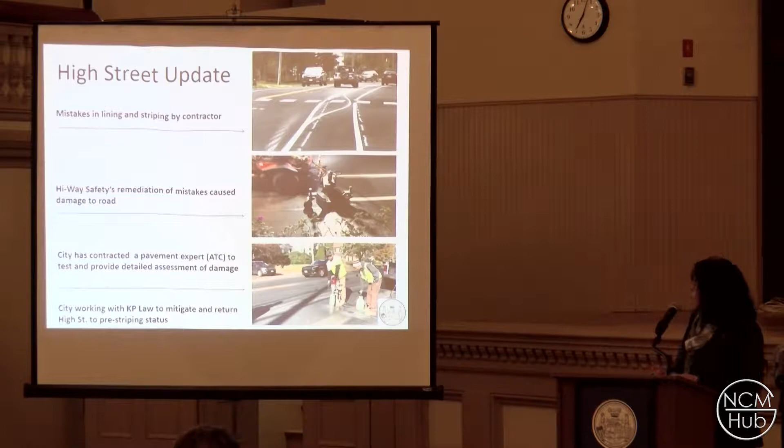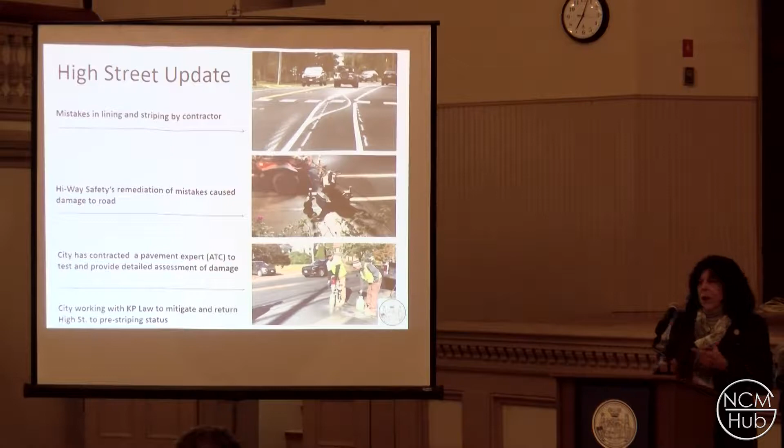So we brought in a contracting pavement expert, ATC, who came in last week and collected about a dozen borings, cores of the road that are now out being tested, which will give us really solid information to stand on as we move forward and work to challenge Hi-Way Safety in terms of the work that they've done. We've pulled in our city solicitor, KP Law, who is working with us, and our goal is to return High Street to the pre-striping condition it was in after Allied did the paving that was there. So we will continue to aggressively work on this, and there'll be more information on it.

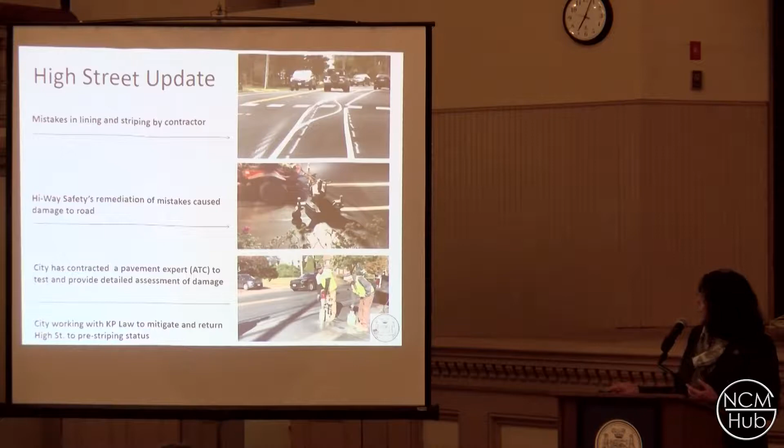So what are some of the challenges we're faced with when it comes to paving our roads? First of all, we've had decades of deferred maintenance all across the city and declining infrastructure. And when you look at paving a road, you also have to look at what is under the ground. We have not only problems with our roads and sidewalks, but also infrastructure issues across the city in terms of what's under the roads: water lines, sewer lines, and gas lines.

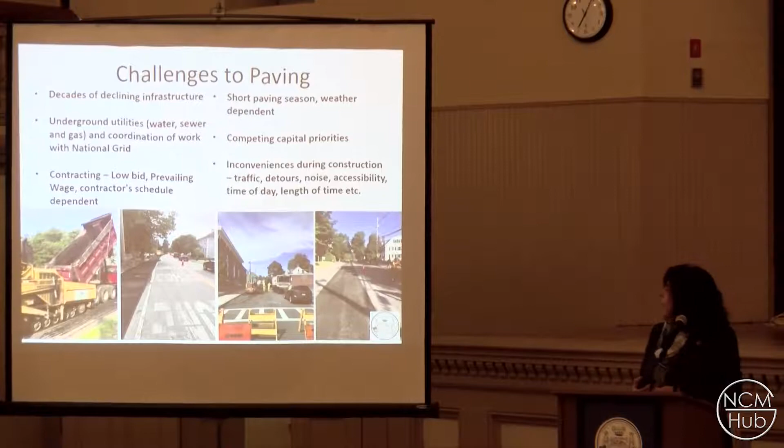When we look at contracting, we are in a climate where we have to accept a low bid, and I'm going to just say it—that's why we wound up with Hi-Way Safety. They were the low bid.

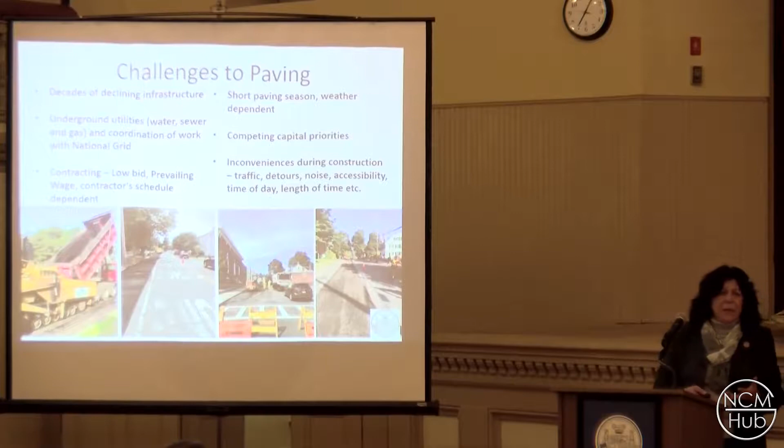They weren't the striping contractor that we've used before. We also must follow prevailing wage, and we're also really dependent on contractor schedules. We have a short paving season, and certainly it really depends on winter weather conditions.

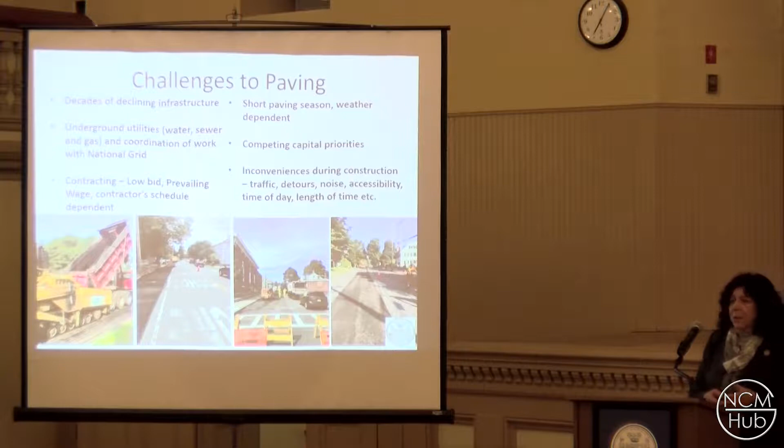For example, if you all recall that wonderful winter of 2015, where we hit 10 feet of snow in 6 weeks, we still had mountains of snow in May. So we really lost many months of being able to do work on our streets. That doesn't always happen, thank goodness, but it's certainly a factor in terms of how much work we can do.

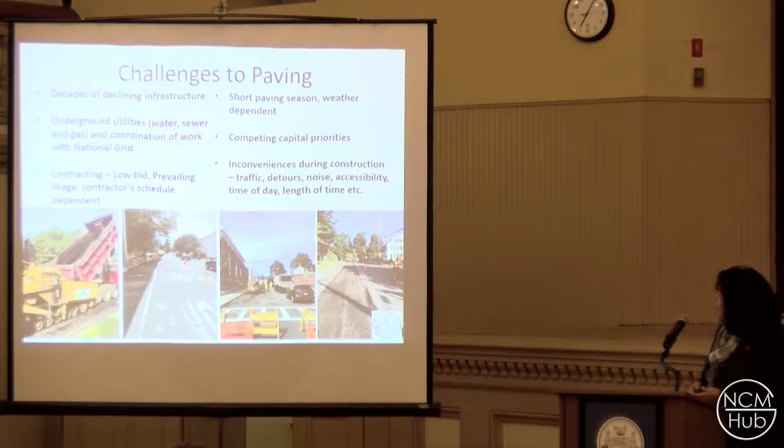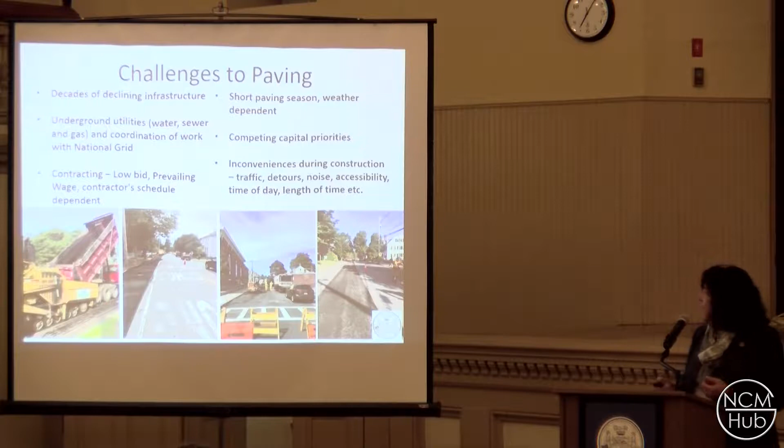We also have competing capital priorities. And once we start paving, we also end up with people complaining about noise, construction, traffic, detours, accessibility, why are you doing it now, time of day, all of those kinds of issues. And we work really hard to communicate with neighborhoods regarding paving.

So how are our roads and sidewalks funded today? We receive state Chapter 90 funding, and we have been advocating - many of you know that I sit on the executive board of the Mass Municipal Association, which represents all municipalities across the state of Massachusetts. And we have been advocating for many, many years for an increase in Chapter 90 funds.

This is the money the state gives to each community based on a formula on how many roads the city owns, in terms of how much money they will give you in order to work on your roads and sidewalks. That formula has not been upgraded in decades, and we've really been advocating with the legislature to increase that. They put out a $200 million bond and then divide that up amongst all the communities for Chapter 90 funds. We get approximately $517,000 a year in terms of Chapter 90 funds.

We have passed an ordinance in the city where 50% of our meals tax, which happened in 2010, is allocated towards sidewalks, and that's approximately $300,000 a year. And then we also, depending on how the budget is going in any given fiscal year - Ethan will go over some of the numbers over the last several years - we've been able to allocate additional money from our city budget for roads and sidewalks.

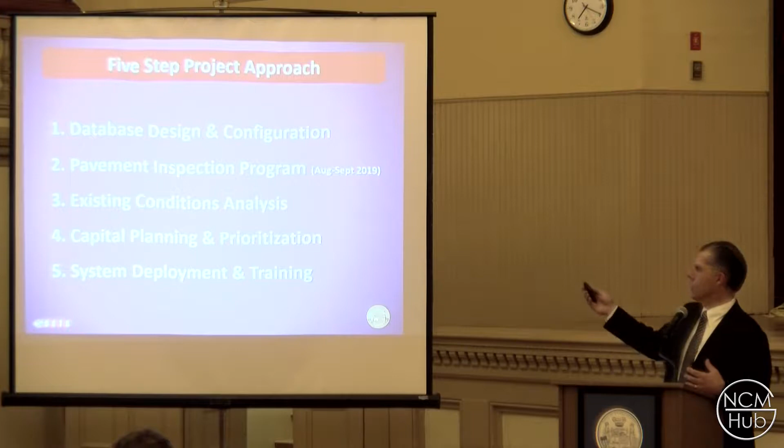The pavement inspection program was completed in August and September. You may have seen a vehicle driving around the city collecting information over about a period of a week. Then from there, once that information is collected and compiled within the database, that gives us now the ability to do an analysis of the information.

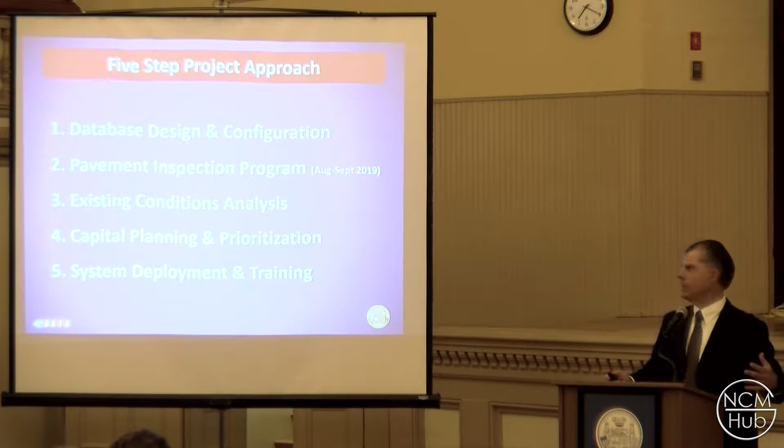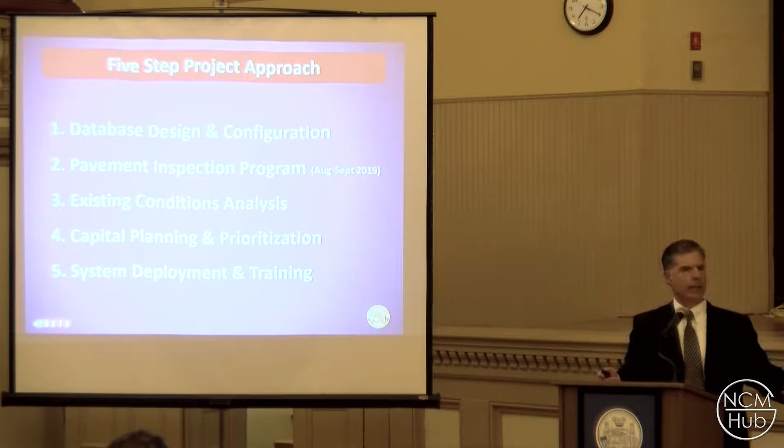There's a great deal of information now that the city has at its fingertips to utilize in the planning process. Step 4 is next steps — we're not there yet, we're still in the data analysis phase. Now we're going to move ahead and develop a prioritized plan. The last step in the process is system deployment and training, where we'll come in and install the program and provide training right at the DPS office.

The data collection program focused on the city's accepted roadways, approximately 72.64 miles of accepted roadways. There's a total of a little over 86 miles of roadways that make up the entire city, but the inspection program focused on the 72.64 miles.

Other aspects of the data are important too, like the mayor mentioned, underground utilities — that's something that needs to be considered. So you have the condition of the pavement, but you also have the underground infrastructure, which is just as important in terms of developing your decisions on your paving program.

Here's some sample roadways. The way the system works is there's actually video collected along all the city road miles, and a photo is created every 10 feet. So when we install the system for Tony and Jamie to utilize, they're actually going to have a photo every 10 feet. They can click and see a photo. These are some examples of the photos that'll be available to them.

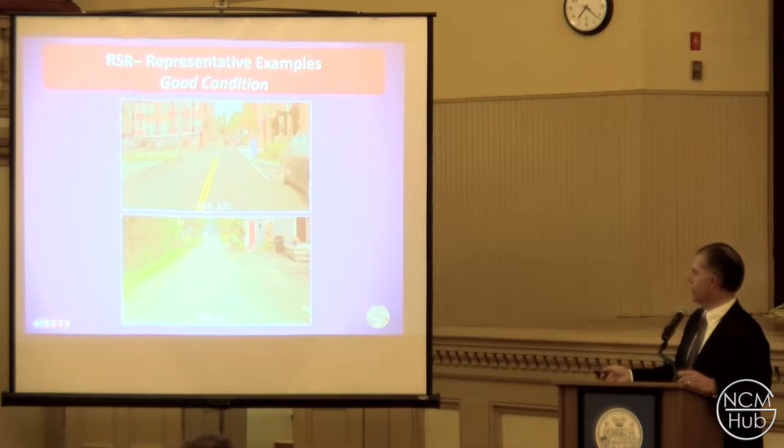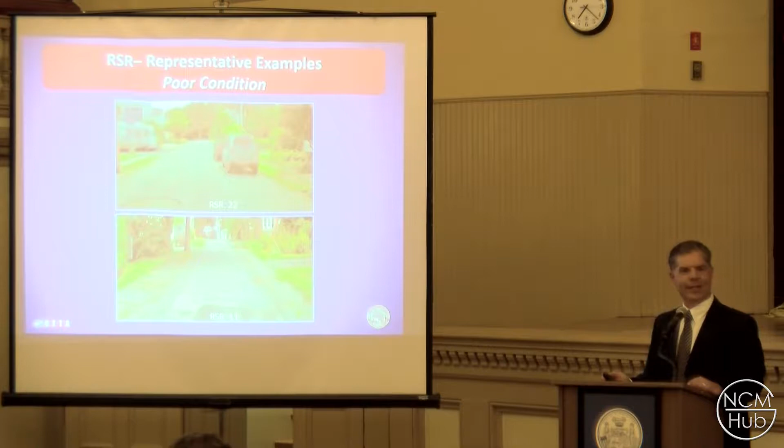Example of a road that's a 100, so that's obviously a road in very good condition. Roadway that's an 85. Then we get into the fair condition category, and you can see how the roadways are starting to show more deterioration, more defects. Here's a roadway that's a 74, a 56, and then we get into roadways that are in poor condition, scores of 22, and the last one shown as an 11. So you can see how the photos range in degree of distresses that exist on the roadways.

So there's a lot of photographs that are available now, so you need a lot of storage.

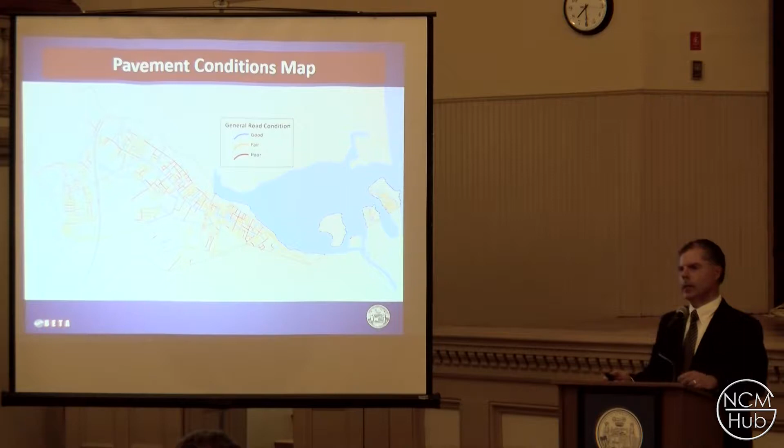This is a map depicting the general condition of the pavement that I've been talking about. You have your good in blue, fair in yellow, and poor in red.

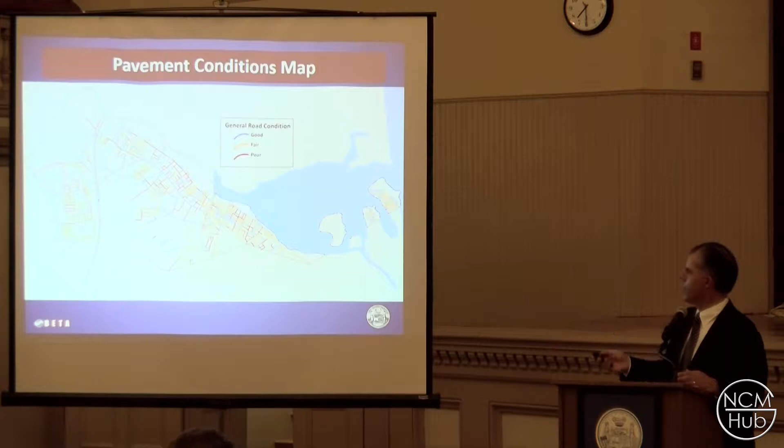We've also got the gas network available to us, so now we know material information about gas and how that comes into play in terms of planning.

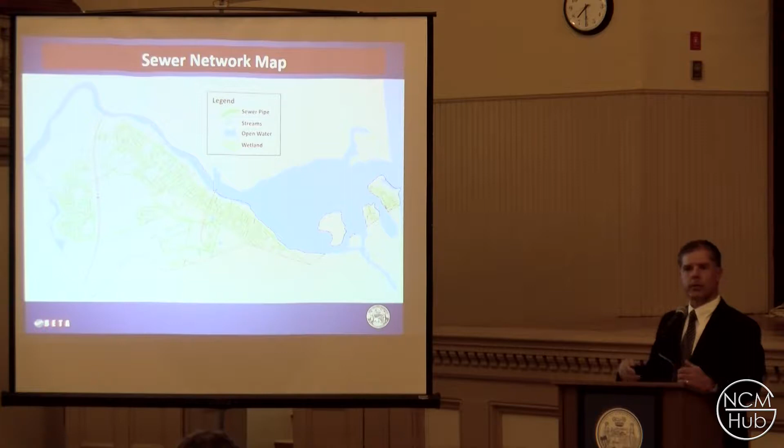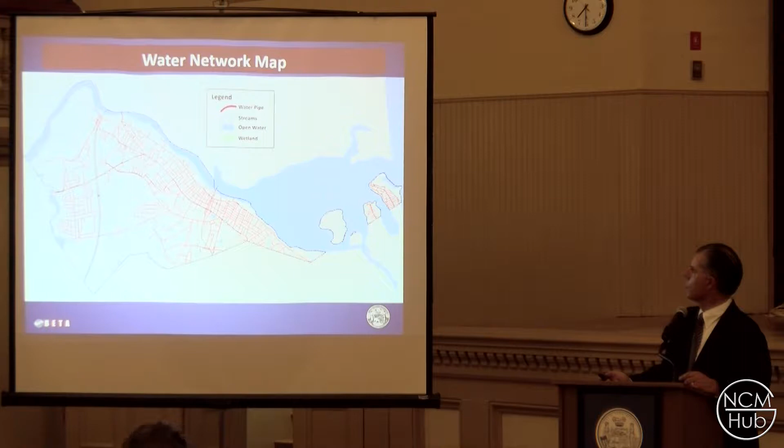For sewer, we know where sewers are, the material, the pipe size, all that information is available to compare to the road, and water information is available as well. We have varying degrees of information, and in some cases we know the age of the pipe, which helps in planning and realizing we may need to check underground before committing to paving work. It's important to address that prior to paving.

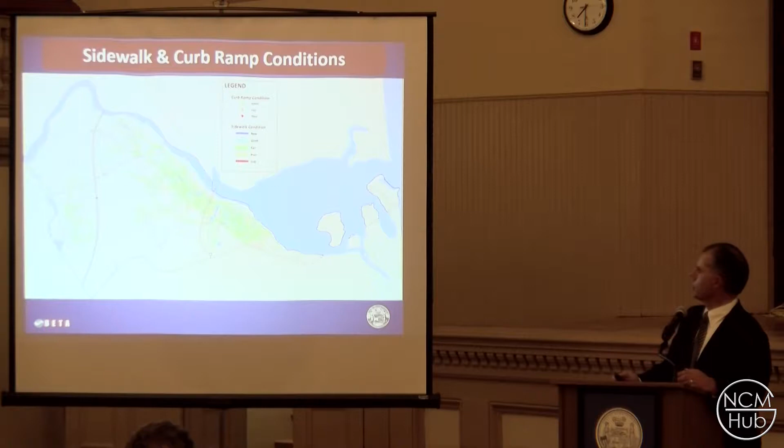Sidewalks, this is an example of the sidewalks. There's a great deal of information available now within GIS.

We're looking at different funding scenarios, utilizing the condition of the roads, the cost associated with improvements, the life improvement of those improvements, and also ongoing deterioration taking place. Unfortunately, as you're improving roads, other roads are also deteriorating, and this is all accounted for within the model.